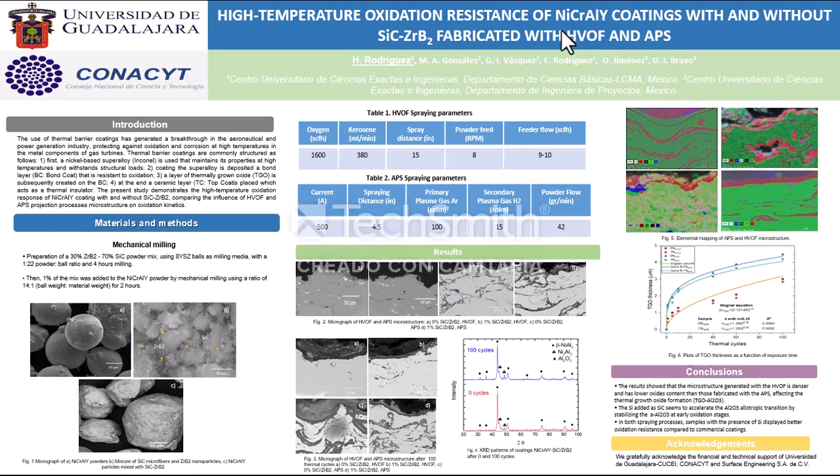Thermal barrier coatings normally fail with the thermally grown oxide when it reaches a critical thickness level. With this, this work was made to study the oxidation resistance of commercial and composite coatings of silicon carbide zirconium diboride projected with both HVOF and APS projection systems, comparing and analyzing which had better response to oxidation.

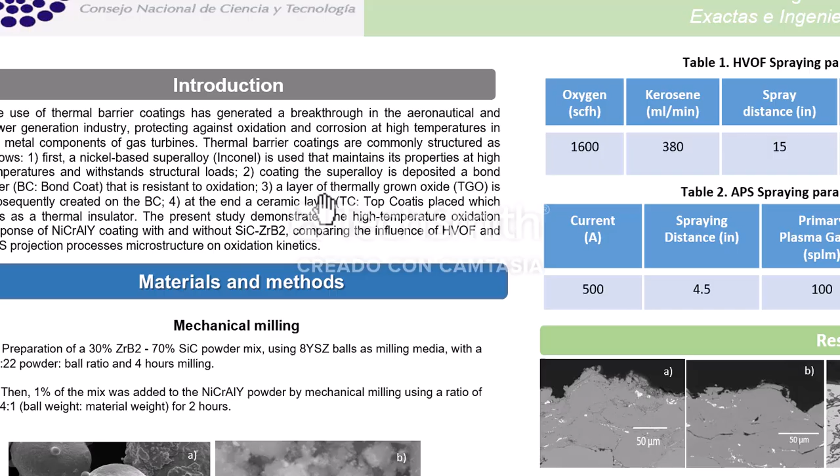For the generation of composite material, a mechanical grinding process of zirconium diboride particles was mixed with silicon carbide microfibers for 4 hours; the obtained mixture was added to the commercial powder for 2 hours.

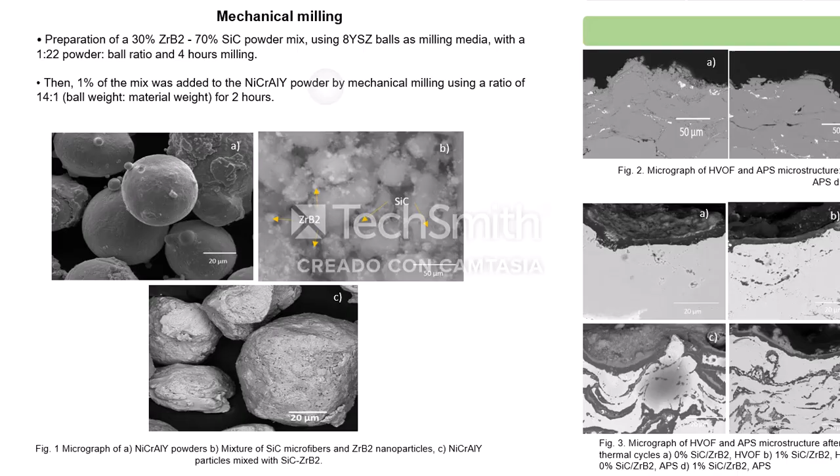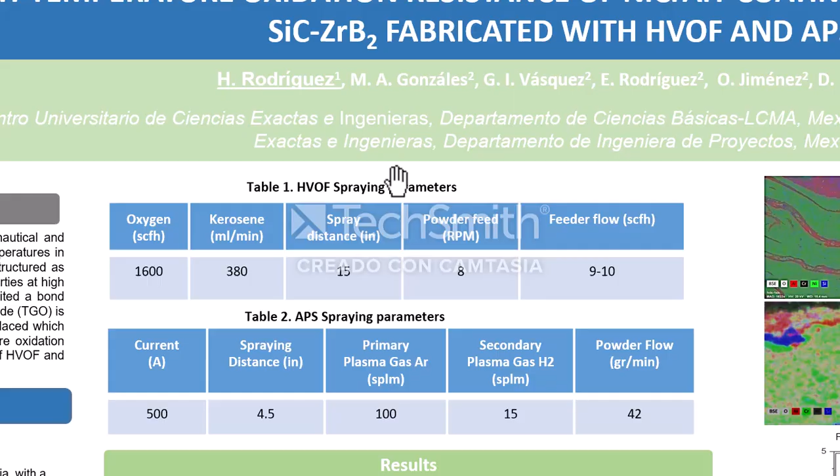The following tables show the projection parameters used to obtain the coating with both processes. The coating was projected on samples of Inconel 718, 1 by 1 inch. According to this, for the coating system, we obtained 2 specimens with HVOF, one corresponding to the commercial powder and one corresponding to the silicon carbide zirconium diboride, and 2 more corresponding to the APS process.

Once the coatings were fabricated, the samples were exposed to thermal oxidation cycles, 100 cycles in total. Each cycle consisted of 40 minutes of heating and 15 minutes of cooling at a temperature of 1100 degrees Celsius.

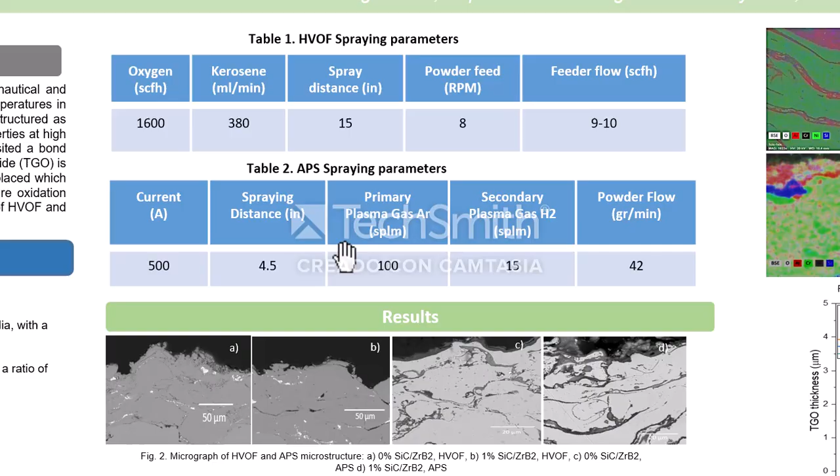According to the results, the microstructure obtained with the HVOF process is better in comparison with that obtained with APS, which shows splat oxidation and high porosity. Also, the distribution of silicon carbide along the intersplat region in the APS and HVOF systems.

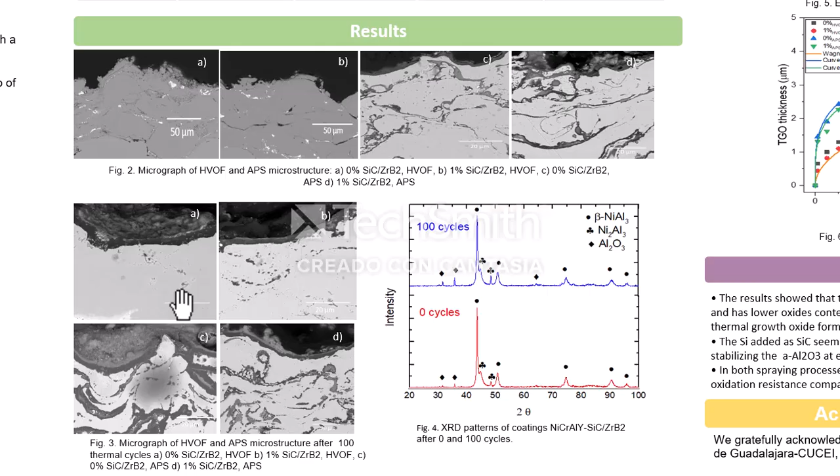This micrograph shows the cross-section of the coating system after 100 cycles. It is notorious for both processes that the thermally grown oxide was observed, as well as internal oxidation of the coating. The TGO appears in both the APS and HVOF coatings, also the internal oxidation.

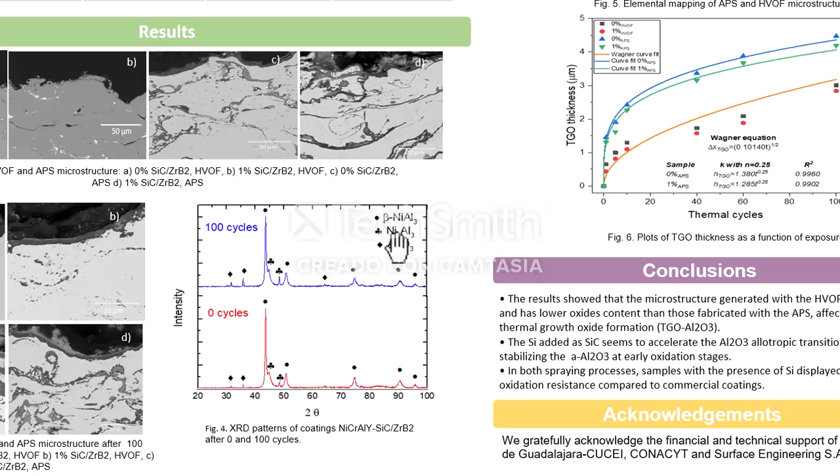The X-ray diffraction results confirm the presence of the TGO layer in the samples, also the presence of the phases beta aluminum nickel and secondary phases, which are normal to be present in this type of coating.

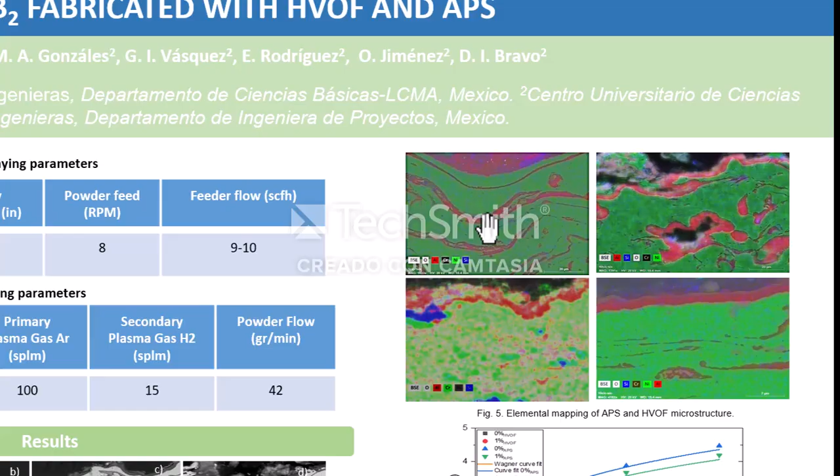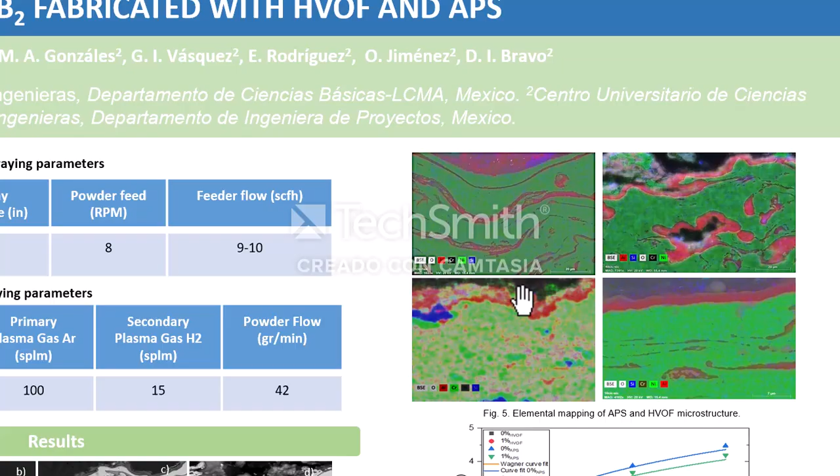The element mapping shows that aluminum oxide and silicon are distributed in both samples after 100 cycles. These element maps help to show that the APS sample experienced more oxidation than the HVOF sample, and the silicon segregates to the surface, possibly from oxide formation.

Finally, the oxidation kinetics of the coatings were obtained by plotting the TGO thickness as a function of time and comparing the results with two different equations: the Wagner equation and a parabolic one. The graphs show the coating fabricated with HVOF displaying the lower oxidation rate and APS following a parabolic curve. But more important, samples with the addition of silicon carbide in both projection systems show a lower oxidation rate.

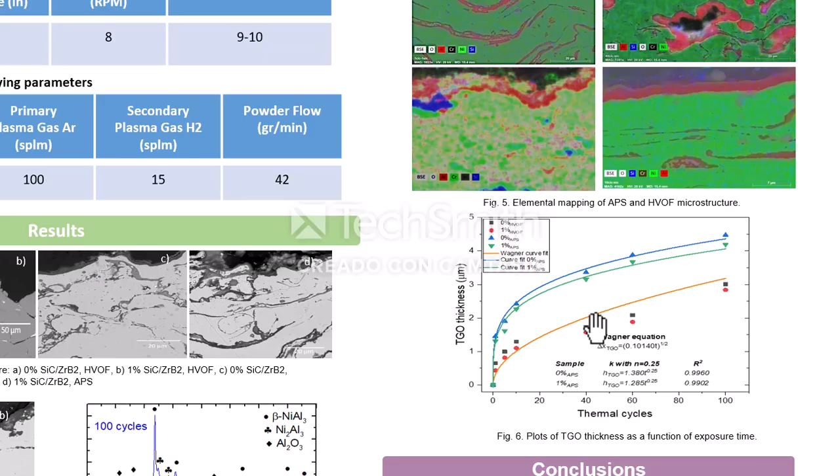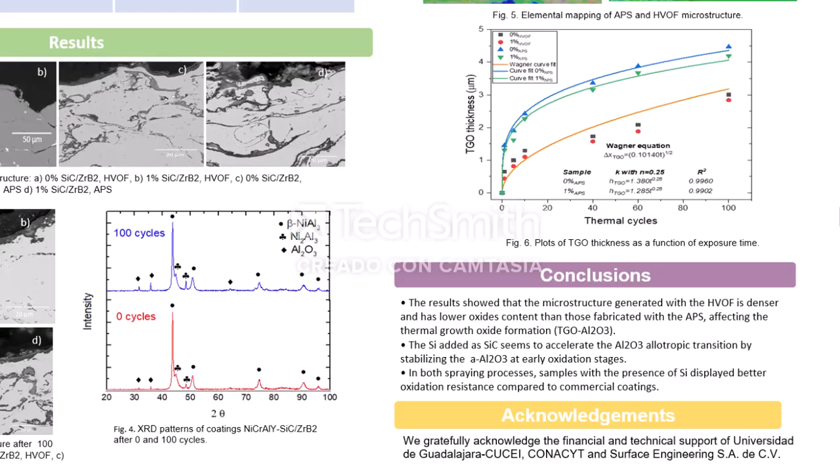After analyzing the results obtained, it can be concluded that the microstructure generated with HVOF is denser and has lower oxide content than coatings fabricated with APS, affecting the thermally grown oxide formation. The silicon addition as silicon carbide seems to accelerate the aluminum oxide allotropic transformation by stabilizing alpha aluminum oxide at early oxidation stages. In both processes, samples with the presence of silicon display better oxidation resistance compared to commercial coatings. Thanks for your attention.